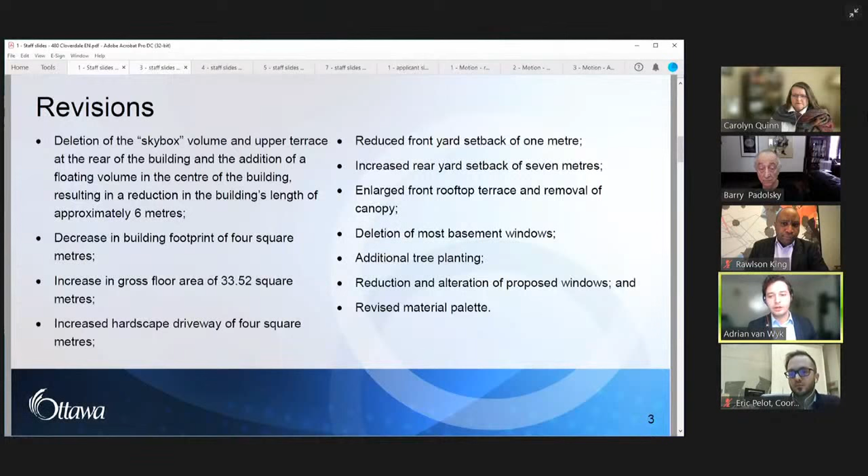Next slide, please. On this slide is the revised site plan showing the floating volume moved to the middle of the building in light gray, and the increased driveway surface at the front. The north wing of the building is also no longer angled away from the north lot line.

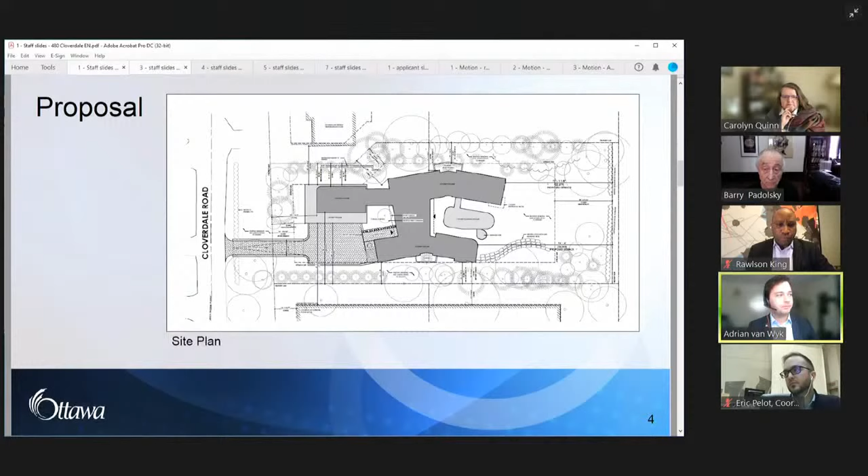Next slide, please. The next 2 slides show elevations of the proposed building. On the left is the front elevation, and on the right is the rear. The subcommittee will notice that some changes have been proposed with respect to materiality.

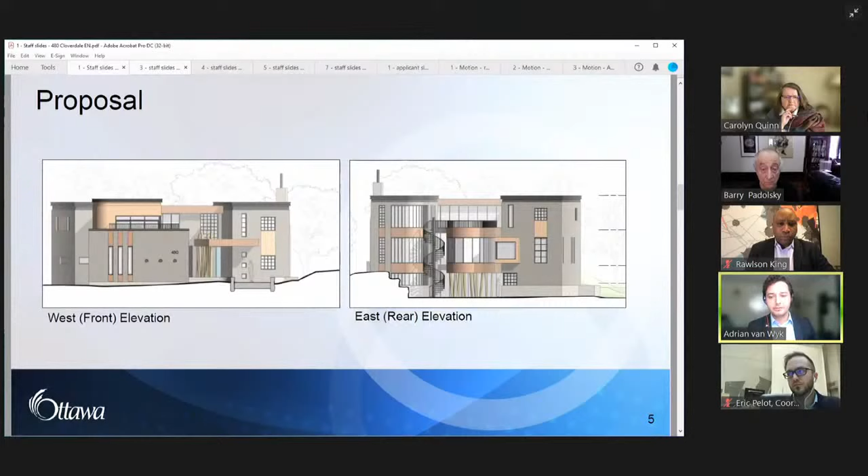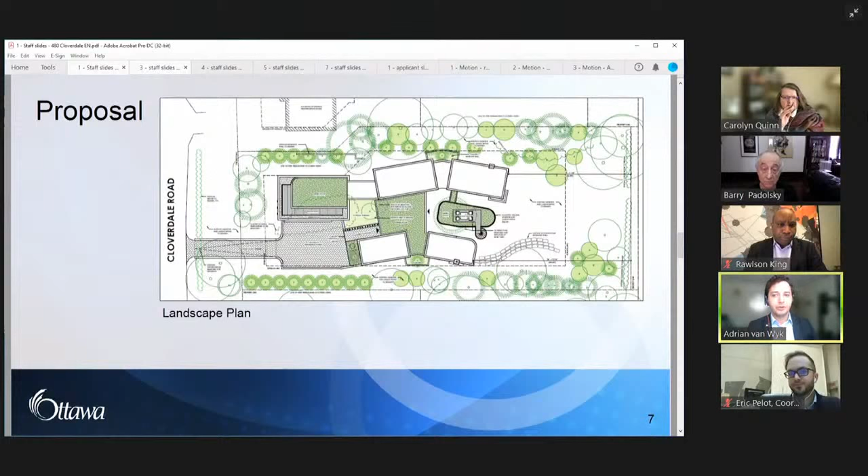Next slide, please. On this slide is the revised landscape plan, which notably shows additional tree planting along the north and south lot boundaries. Next slide, please.

4 renderings of the building are shown on this slide with trees omitted. As can be seen, the building has less variation in materials and articulation than before, as well as fewer windows. Next slide, please.

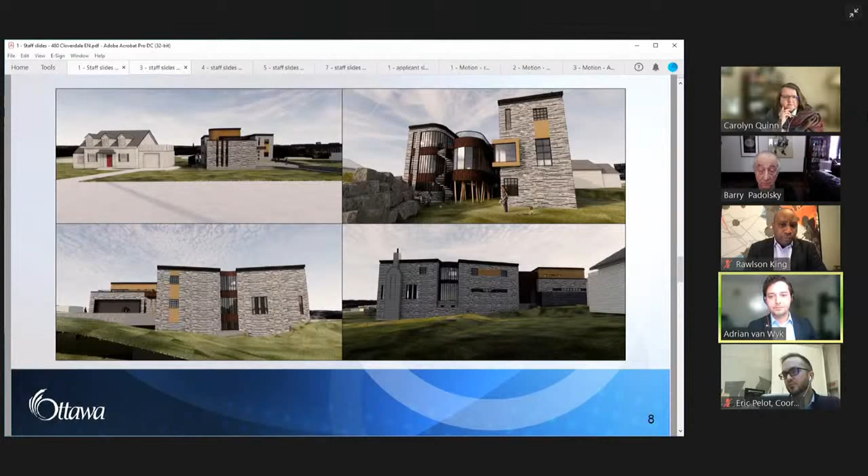Heritage staff have evaluated the proposed revisions against the guidelines in the Rockcliffe Park HCD plan. The subcommittee will remember that in November last year, staff expressed concern about the length and mass of the proposed building, especially along its north elevation. While the length of the building has been reduced by approximately 6 meters, Heritage staff consider this to be only a minor reduction in length, and our concerns remain. In addition, further changes to the proposal have brought it further out of conformity with the HCD plan, especially as it relates to front yards, height, mass, landscaping, and the overall objectives of the plan. In staff's opinion, the cumulative effects of these changes, together with staff's original concerns, merit the conclusion that the proposal does not conform with the HCD plan.

Next slide, please. Staff have also reevaluated the proposal against the standards and guidelines for the conservation of historic places in Canada. Again, because of the changes made to the proposal, staff are of the opinion that it does not conform with standards 1 and 11. Next slide, please.

Following the decision of the subcommittee to defer the application, Heritage staff was invited to a meeting with the applicant, neighbours, and Councillor King to discuss our collective concerns and the applicant's proposed revisions. The revised submission package was also recirculated after staff received a complete application. Next slide, please.

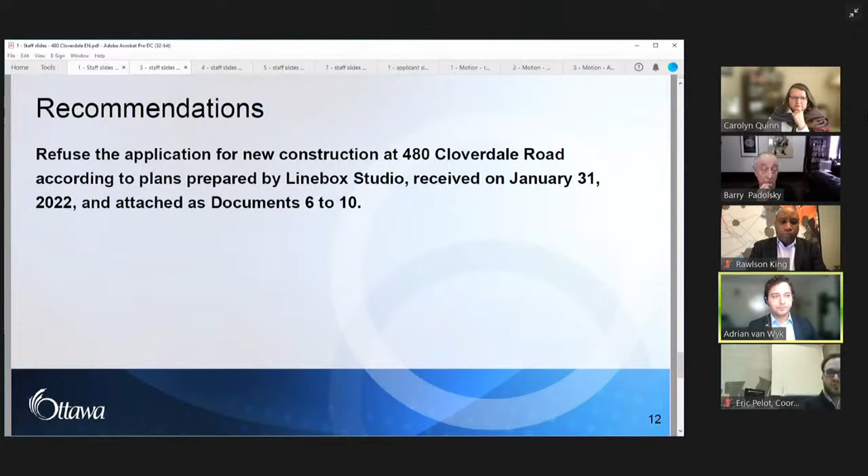Heritage staff are recommending that the application be refused as it does not conform with the Rockcliffe Park HCD plan or the standards and guidelines for the conservation of historic places in Canada. Next slide, please. And that concludes this presentation.

Thank you, Chair. Thank you for that detailed report. We did receive correspondence from numerous residents from the Rockcliffe Park Heritage Committee, as well as Heritage Ottawa. And correspondence was also submitted on behalf of the applicant.

We have a number of registered speakers on this item, and the first registered speaker is Michael Killen of the Rockcliffe Park Residents Association. And I think you're muted, Michael.

Okay, can you hear me now? We can. Very good. Well, thank you, Mr. Chairman, members of the committee. I'm on the Rockcliffe Park Heritage Committee and have been working with the applicant and other members of our committee to assess this application for a heritage permit.

And following the November 30th meeting, it was agreed that this matter would be adjourned so that the applicant could make revisions to the plans to conform with our concerns under the heritage plan. And we did receive these revisions. And I'm sorry to say that while they have reduced the size a little bit, the building is still mammoth.

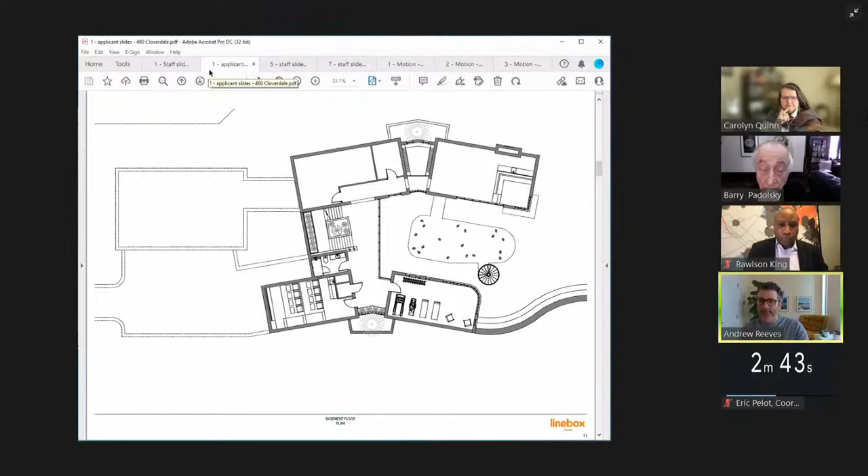If you keep going until the side-by-side images, what we did here is start showing images of the existing building with the trees. These trees aren't artistic interpretations, they're in the accurate locations of where they are. I want to be very clear. I know it's mandated that they submit drawings showing elevations you'll never see in real life, so we want to really recreate what is there physically. We spent a lot of time making sure we respected the existing slope and existing trees, and then showed more colorful trees as proposed to help further screen.

We picked up on windows, window sizes and proportions that you can see have changed from the previous application. We picked up some of those proportions from the neighboring houses in the neighborhood. This one shows our little rooftop terrace over the garage, which is exactly identical to the neighboring Heritage One house that has a rooftop patio on top of their garage. So we're trying to pick up on certain elements, major and small.

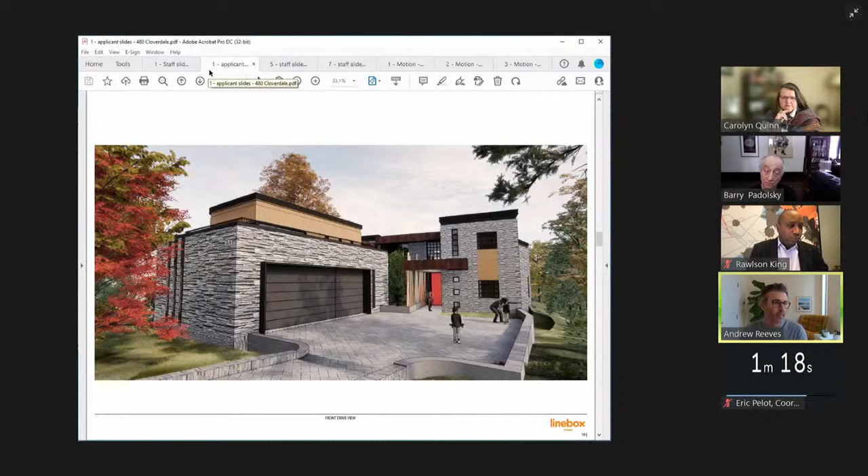Next slide, please. If you can keep going down to the side-by-side images, that might help explain the before and afters. These slides explain our previous application versus what we're submitting today — left and right. Left is always the previous, right is where we are now. As you can see on the right-hand side, we've played with a material palette to be more in keeping with the, I'd call it more monochromatic, nature of neighboring homes.

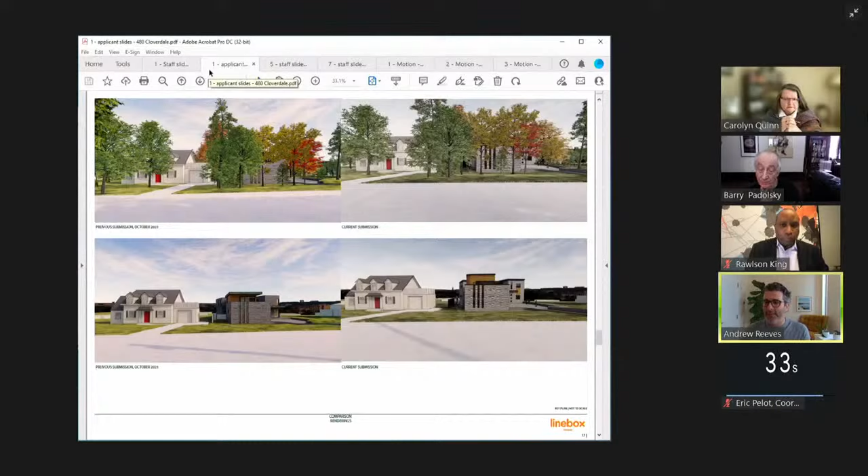We deleted the overhang on top of the garage, as you can see, to help reduce the massing. This building's height is within the required height — we're not asking for one inch of additional height. I want to make that clear on record: there's no increase of height required, no increase of setback required, no increase of lot coverage required. Zoning-wise, outside of heritage concerns, there is no minor variance or request.

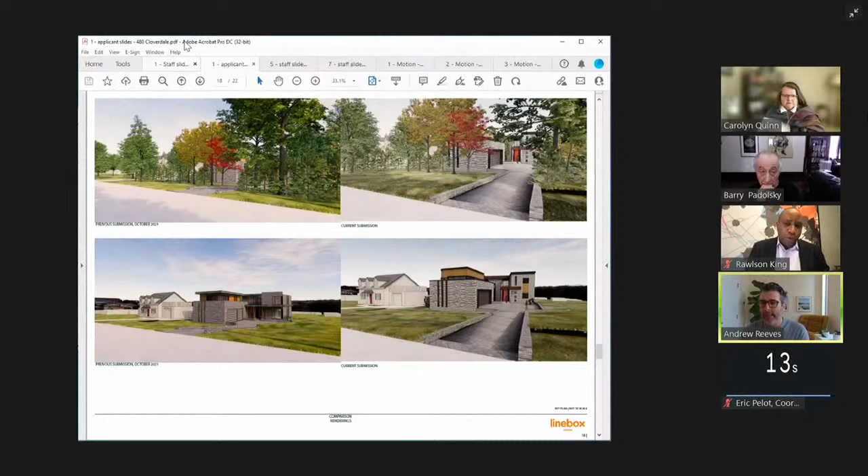Next slide, please. Again, we're trying to see how we can subtly pick up windows and textures. You can see on the left how it was versus the right. The windows on our building are the same size and proportion as the heritage home. We're adding some more gridding and grid work to the windows to help break it up, including the different material palettes.

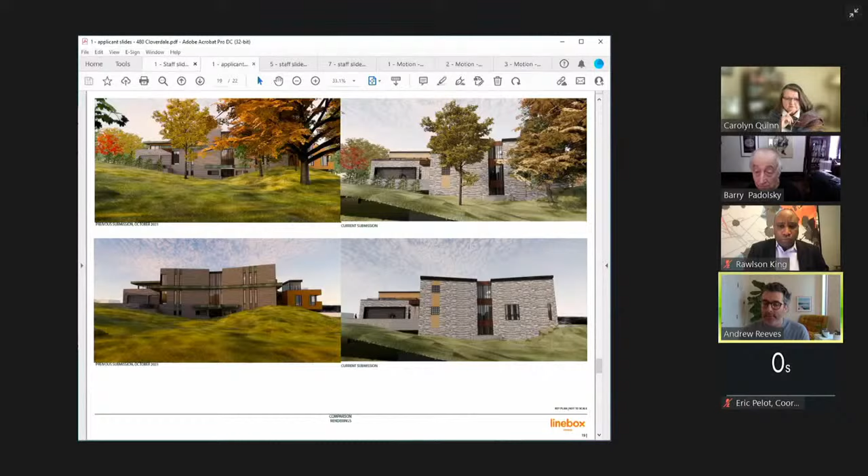Next slide, please. The side elevations — you can see the before and afters. We've seriously deleted a lot of windows and broken up the massing as best we could, knowing we have privacy issues between both neighbors, even the future home next to us which will go through its own design iterations. So we made sure we located windows that break up the massing, allow light and sun into our space, but also don't create awkward views to each other.

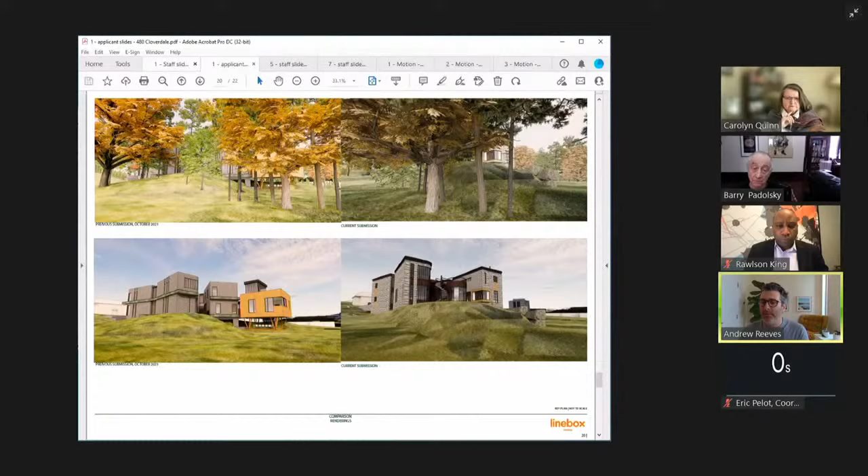Next slide, please. This is the rear, which shows what I consider a very major change on massing, height, and length — not just a reduction of a skybox. You can see the rooftop terrace that was there, the rooftop access that was there, the massing itself, and the intrusion to the backyard. We're also now showing the landscape as it is, 100%. We're not altering the contours one bit. The trees above show you what you'll actually see from neighboring lots.

Next slide and I'll be done. This one shows what happens when we delete the skybox. Again, showing artistic renderings with no trees, which is a bit unfair, but we're sticking with how we need to present these things. This is how you never see this building in real life—it'll be fully treed, and you're still physically on our property. But I do want to show how the massing has been affected, both the massing, the height, and the length.

I don't want to take up any more time with yourselves, maybe some questions.

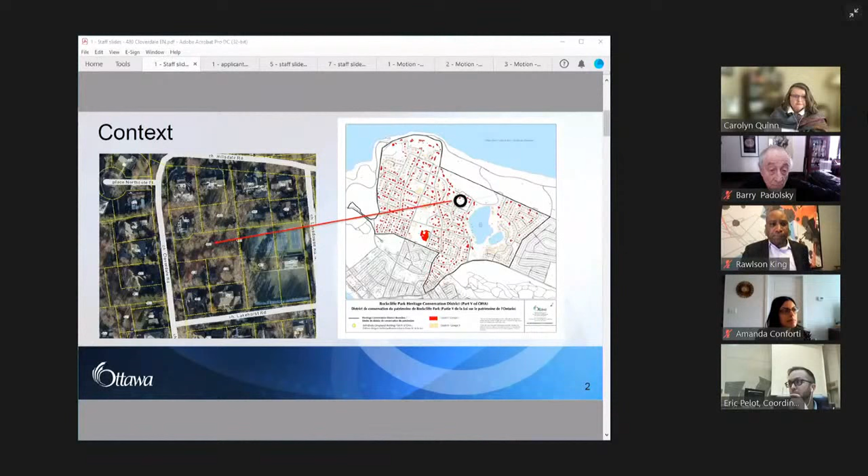I believe Vice Chair Quinn's talking about the second slide on the staff presentation. Would that be it? Well, no, but this is a good slide nonetheless. It actually shows very well the complication, the oddity of this lot within this enclave, that the lot is surrounded by vacant lots, which are obviously likely to be developed in time.

But I guess I do have a question about this, Adrian. There's a large house at the corner of Cloverdale and Hillsdale, just to the north of 480. And I'm just wondering, from the rear, when you look at that property, how many stories is it?

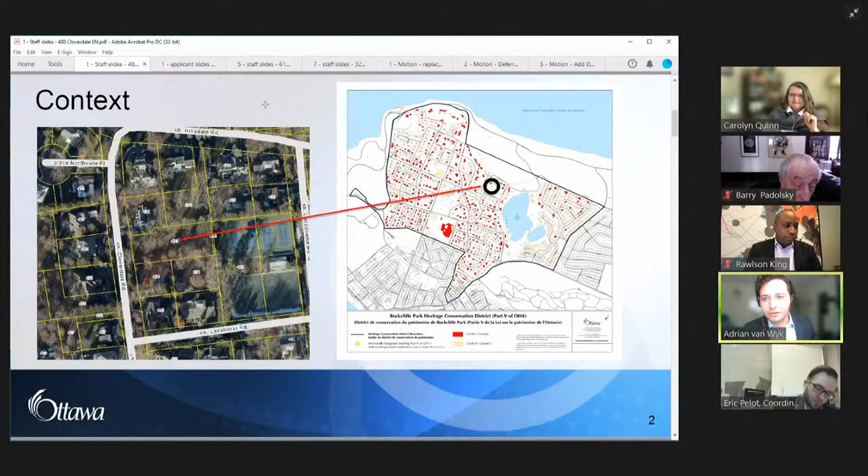Hello? Hi, through you, Chair. I believe that is 2 stories. Is that 540 Hillsdale? Yes. Yes, I believe that is a 2 story home.

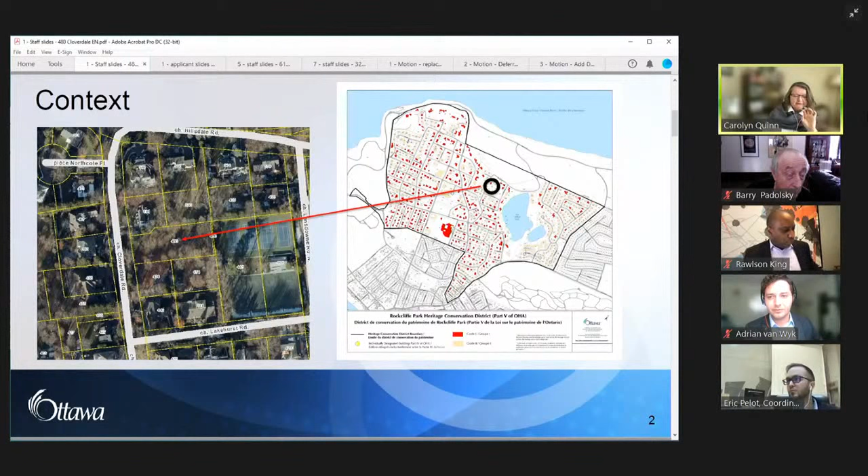Thank you. But what I'd like to look at is the slide that shows the rendering of 480 Cloverdale from the perspective of Cloverdale itself.

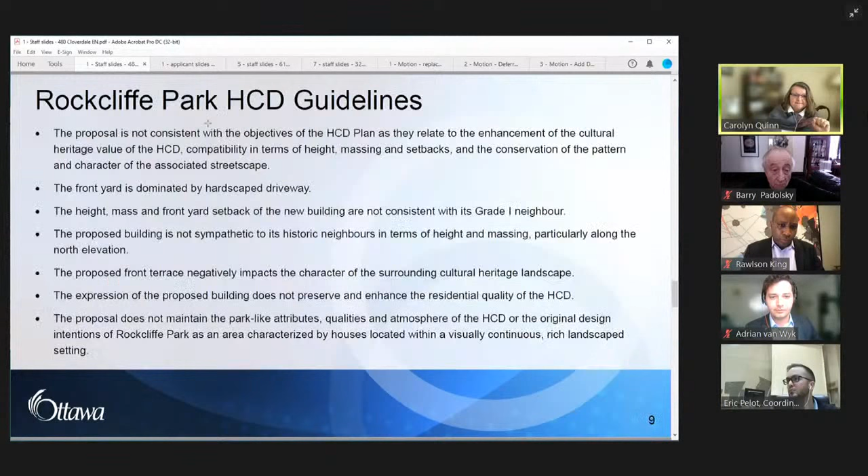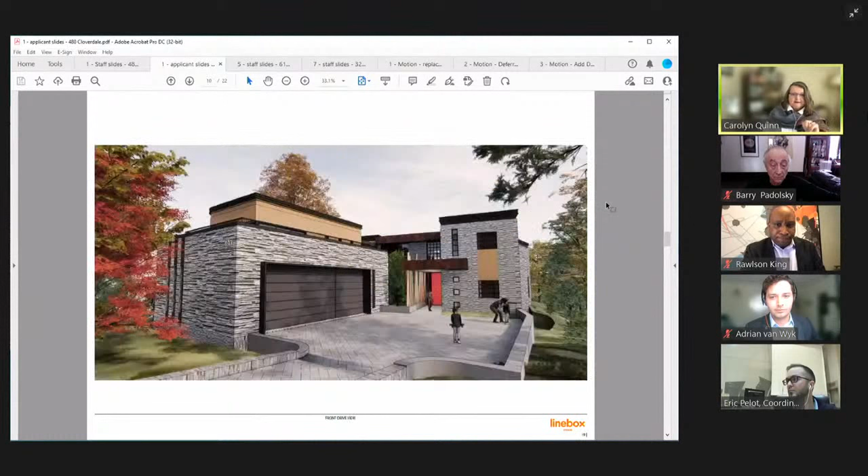Thank you for taking the time to do this. There, that's pretty good. But that shows 484. And then I'd like you to speak to this question of the roofline issue.

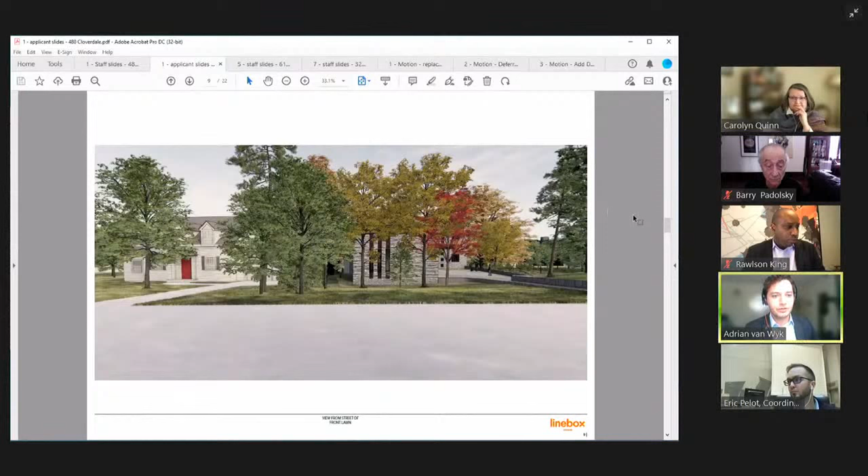Thanks for your question. So the Rockcliffe Park HCD plan provides that the height of new construction must be consistent with the height of adjacent grade 1 buildings. And as a speaker previously mentioned, typically according to the zoning bylaw, the height of a flat roofed structure is measured to its peak, whereas a sloped building is measured to the midpoint of the roof, which would be the case for 484 Cloverdale. So the elevation calculations the applicant provided show that the roof peak of 480 Cloverdale is lower than the roof peak of 484 Cloverdale, but it is higher than its midpoint.

The fact that the building has been set 1 meter closer to the street and that it does not align with 484 Cloverdale exacerbates the perceived height of the building. So not only is it higher than the midpoint of the building next door, but because it's closer to the street, it also appears larger for that reason.

And higher by how many meters? That would be 1.66 meters higher than the midpoint.

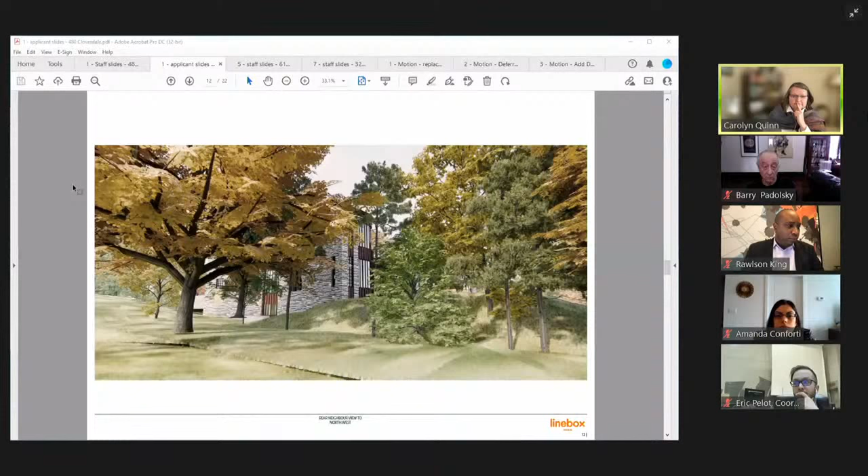Thank you. And then the other slide, I would, if I could, go back to that box showing the landscaping. It had the new trees around the perimeter of the property, the proposed new trees. It's an aerial. Excuse me.

There, yes, there we are. Is there any way you could speak to, especially on the north side property, how many of these proposed trees are evergreens? And are there plans to plant evergreen trees that have a certain maturity, closer to a mature size, rather than just small shrub-like size to start with, if you know what I mean?

I'm just trying to consider Mr. Brunt's concerns about that end of the property.

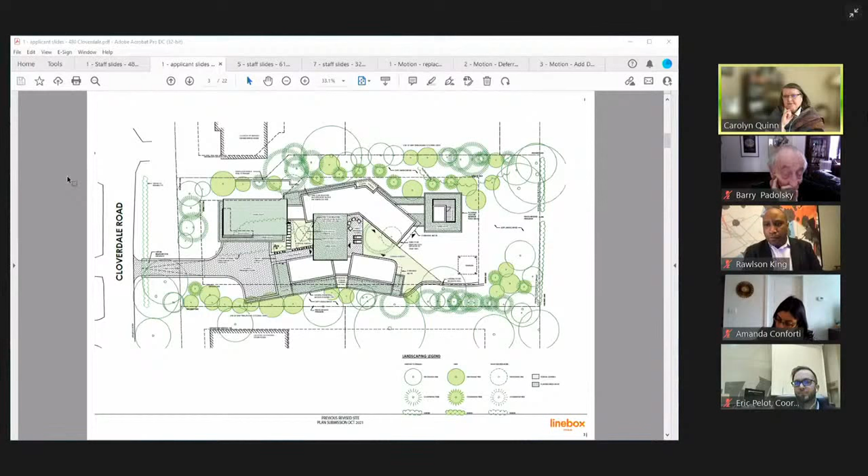Through you, Chair. Eric, I think this is the previous iteration. I think maybe, yes, there's the new one. So the applicant does show, I believe here on this plan, a mixture of deciduous and coniferous trees. Staff are not aware of the exact number; I think the applicant would need to confirm that.

Having walked around there myself a few times now, there is quite a bit of growth along that side of the property. And I understand only 8 trees are going to be coming down? Yes, that is correct. Okay, thank you.

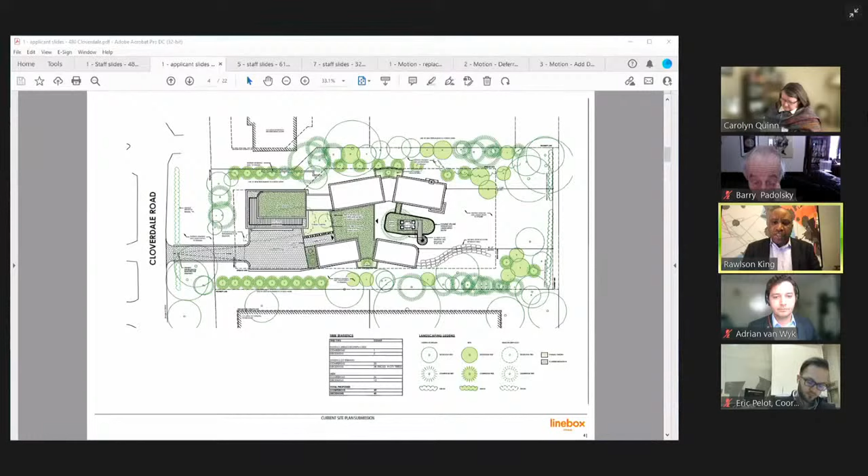Thank you. Are there any other questions from members? Seeing none, do any of the members have any general comments on this item?

And I see that Vice Chair Quinn raised her hand first. Thank you, Mr. Chair. I just want to, excuse me.

I just want to say that I really appreciate the effort that has gone into this project from all sides. I think somebody said it was the 5th iteration, and every effort seems to be made to address concerns. I think what we have here is a very challenging site because it is the only lot within this enclave that actually extends twice the length of everybody else's. The house that existed on that lot in the past also extended past the rear of 484 Cloverdale with a swimming pool, etc. And from my perspective, interpreting green space and park-like setting, which is so essential to the heritage character of Rockcliffe Park, is really about the experience from the public realm perspective of that neighborhood. What we are talking about here is a very internal landlocked property that is not seen from the public realm from any perspective other than Cloverdale.

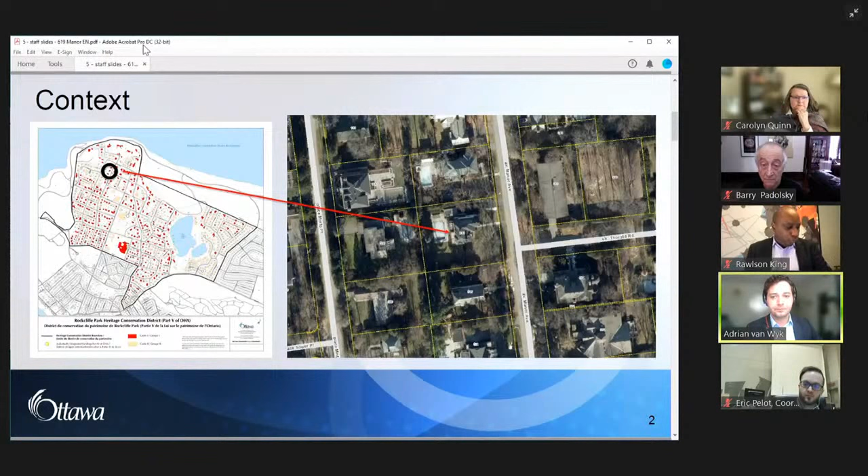The property is classified as a grade 1 property in the Rockcliffe Park HCD plan. The main house on this property was constructed circa 1922 in the English cottage and arts and crafts styles. It is 1.5 stories in height and has an asymmetrical L-shaped plan. The building features a gabled frontispiece, multi-paned windows, a variety of exterior materials, half timbering, and a steeply pitched roof. The landscape features of the property are typical of Manor Avenue and include a substantial front yard dotted with mature trees, cedar hedges and shrubs, and a stepped walkway. Next slide, please.

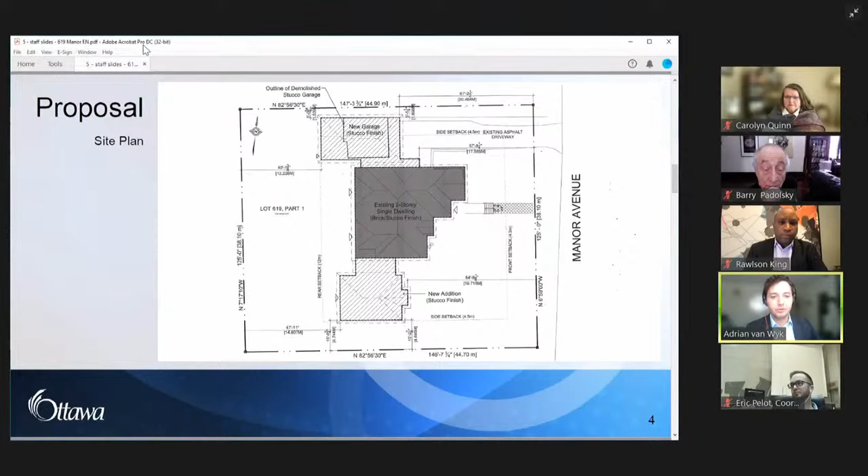The application to alter 619 Manor Avenue is to permit the construction of 2 single-story side additions to the existing building. The application also includes permission to remove an existing sunroom and convert it to interior living spaces, the addition of a flat canopy over the front entrance door, and landscaping changes. The application is accompanied by a landscape plan that proposes changes in the front and rear yards, additional plant materials, sloping plant beds, a new driveway, stone retaining walls, a flagstone path, patios, pool shed, and new pool are proposed to be added. 2 large Norway maple trees are proposed to be removed and replaced with a new cedar hedge. Next slide, please.

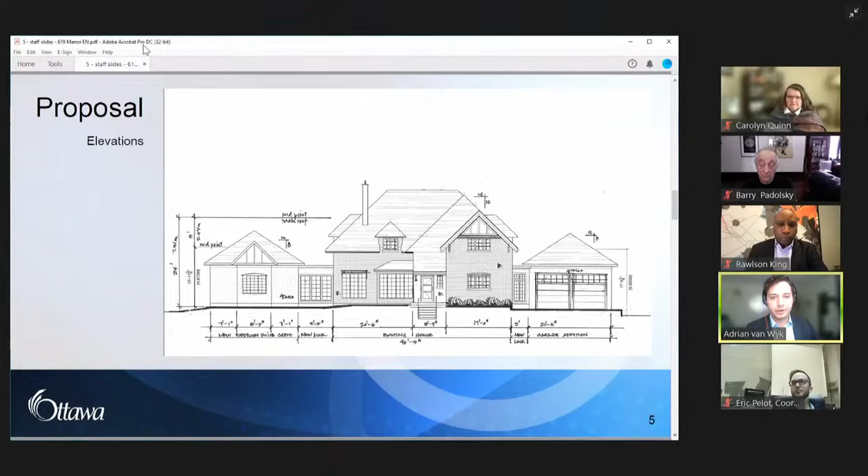The south addition, shown on the left of this slide, will include a separate principal bedroom accessed through the ground floor living room via a transparent glass link. It will contain a full basement. The north addition, shown on the right of this slide, is proposed to replace a former non-conforming detached garage, which was demolished in 2021 due to disrepair. The new garage will maintain the previous side yard setback, but will be set closer to the street and linked with the house by a glass vestibule. Next slide, please.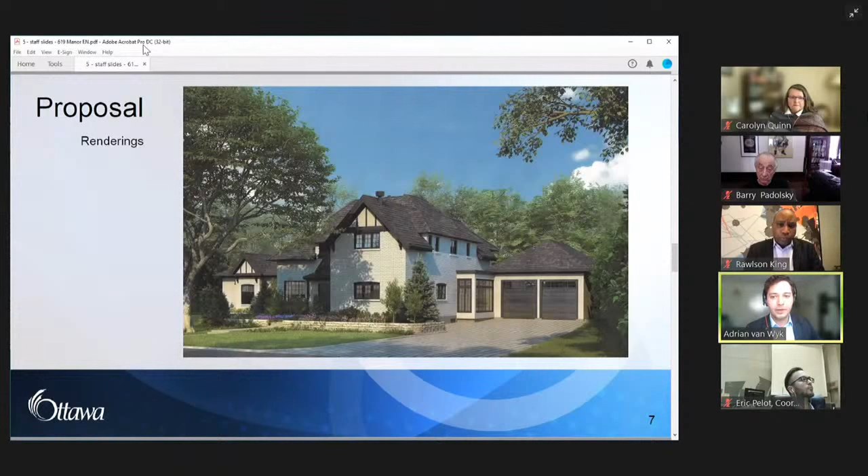Heritage staff have evaluated the proposal against the guidelines in the Rockcliffe Park HCD plan. The proposal meets the provisions of the plan with respect to new additions and landscaping. Next slide, please.

The proposal has also been evaluated against the standards and guidelines for the conservation of historic places in Canada. The proposal is consistent with standards 1 and 11. Next slide, please.

The application was subject to pre-consultation with the Rockcliffe Park Residents Association Heritage Committee. The proposed plans were posted on DevApps and circulated to the RPRA, Heritage Ottawa, and neighbours within 30 metres. Councillor King is also aware of the application. Next slide, please.

Heritage staff recommend approval of the application to alter 619 Manor Avenue. Staff requests standard conditions to the proposal with respect to the provision of final exterior building materials and a final grading plan. Next slide, please.

That concludes staff's presentation. Thank you, Chair.

Thank you for your presentation. We did receive correspondence from the Rockcliffe Park Residents Association in opposition to this application, I believe this morning, and we do have registered speakers. The first registered speaker is Mary Ann Favor from Rockcliffe Park Residents Association.

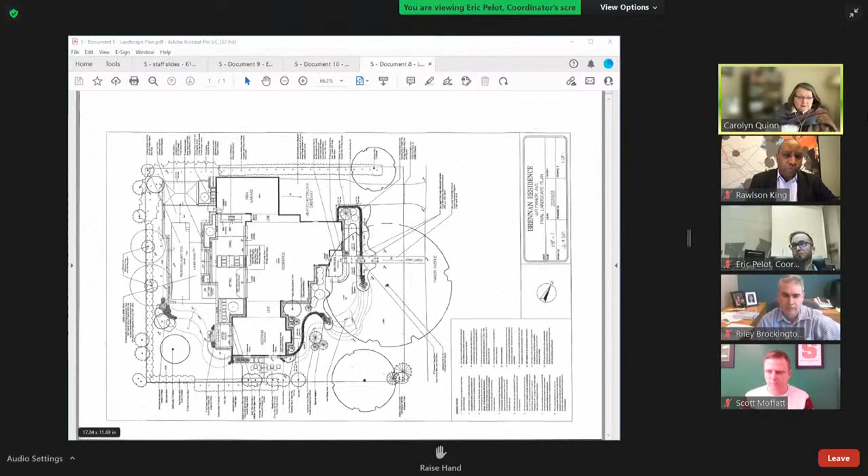And I see that Lesley has her hand raised. Thank you, Mr. Chair. I understand the concerns raised by the Vice Chair. The landscape plan is attached to the staff report as document 8. I'm not sure I can share my screen... okay, I've got it up right now. I'm just whipping through—oh okay, there we go. Thank you very much, the committee coordinator has done it.

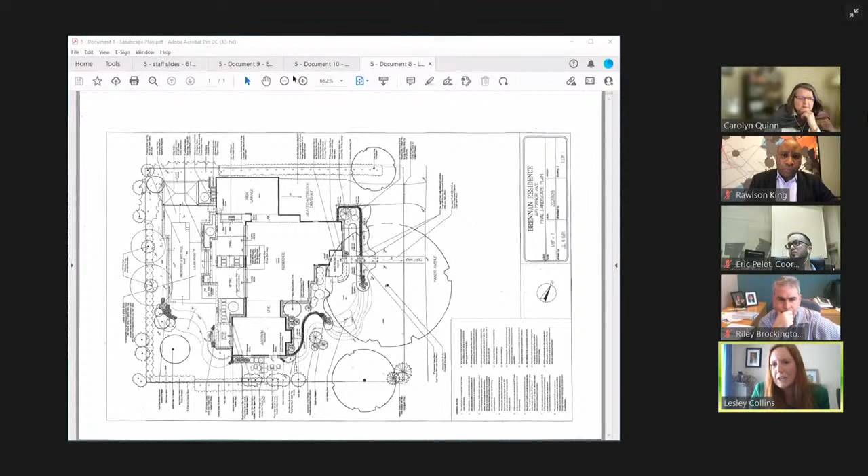So I think you can see here the front yard landscaping, and the rear yard landscaping that looks like a long, narrow pool at the back. I think one thing I'd comment, and then I might turn it back to Adrian for details, is that if you read the Heritage Survey form for this property and its comments on landscape and the contribution to the environment, it speaks a lot about the front yard and the side yard—the sloping front yard and how that contributes to the street. This is not one of those properties where we have a really large rear yard currently.

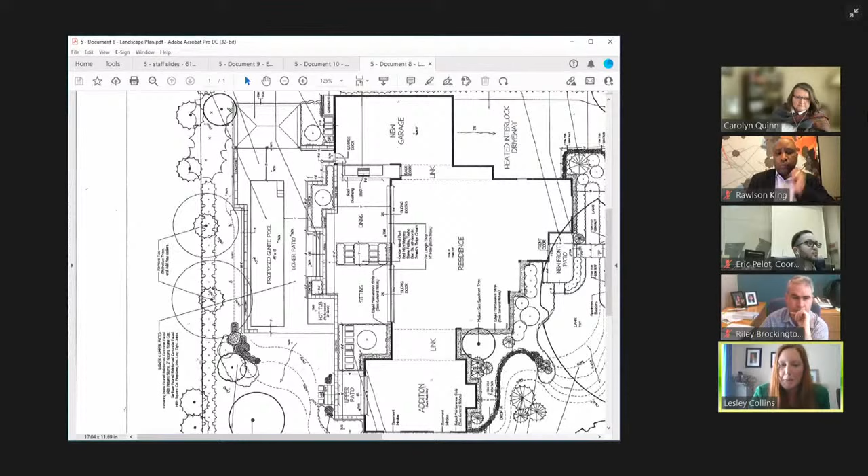I think there's been a lot of discussion about the appropriate location for an addition here and a garage, and where to put the landscaping. Adrian can speak more to the details, but my knowledge of the file is that a lot of work has gone into minimizing the amount of hard landscaping as much as we can, and minimizing tree loss and incorporating new trees into the development. So I hope that helps—we generally don't require renderings as part of a landscape plan when there's no addition at the rear. We usually just go on the landscape plan submitted as part of the application.

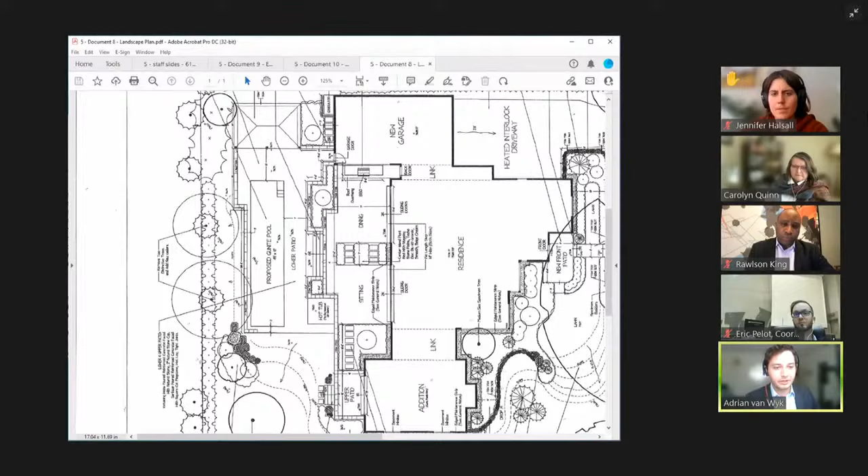Through you, Chair, just to add to Lesley's response: we did identify during pre-consultation with the RPRA that because there is such an expansive front yard, and it is identified as an attribute in the survey form, a lot of focus should be placed on retaining as much front yard in an informal manner as possible, noting that there might be some changes to the rear yard. It is staff's opinion that it does meet the provisions of the plan with respect to soft landscaping, and the applicant is also proposing to add additional plantings and planters that will help to soften that.

Thank you, and thank you for those additional comments. Member Halsall. A quick point of clarification for staff—I just pulled up the address on Geo Ottawa, and they seem to already have a pool in their rear yard. Is this a replacement of the existing pool with a different pool?

Through your chair, yes, the pool that was existing in the rear yard was removed last year, along with the detached garage. It's since been filled in, and according to the new landscape plan, there will be a new pool that replaces it. Based on the plan, it appears that it will be smaller, or at least longer and narrower than what was there before.

Okay, so just to clarify, the staff assessment is that the pool and these other changes that have been brought up are not necessarily a huge increase in the built footprint of the backyard. Yes, that's correct, Member Halsall. Perfect. Thank you for clarifying, Adrian.